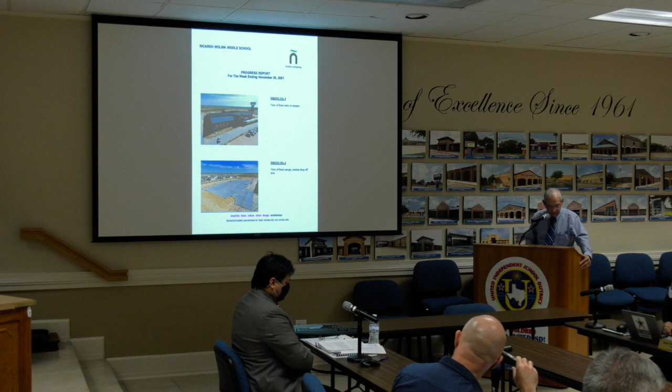Other photos show the academic wings moving along really well, with very nice colors. The brickwork is pretty much completed on that section, and then looking north towards the campus on the rear part of the facility. We have some more photographs to give you an idea and concept of how the campus will actually look in the entire area. That's the front entry, and then we're looking at some of the student drop-off areas.

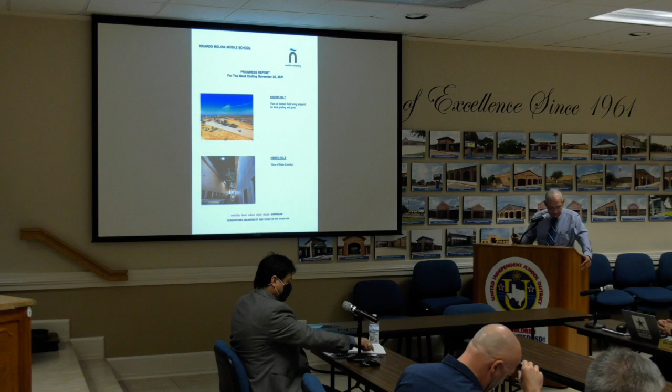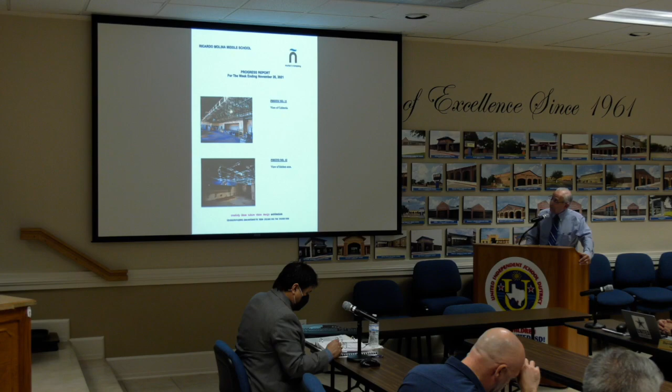Photos 7 and 8 show more of the internal view of the mall area, already under construction with the finishes, plus the library and cafeteria. As you see, most of the components are in place: mechanical, electrical. We're already running the network infrastructure, working together with instructional technology and other contractors. In the kitchen area, all the equipment is already in place.

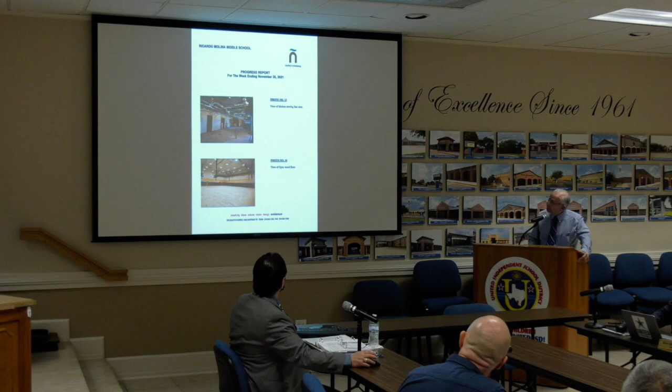As far as the walk-in coolers and freezers, we've got all the equipment in storage, and as soon as the electrical is completed, they'll be installing it next, probably early January. Some of the serving line areas also already have the rough-in completed. The gym wood floor, as you see there, is already completed - they're just sanding and going through the process of applying the coat and the varnish. Then there are some student toilet rooms, the science classroom - all the long lead items are already installed.

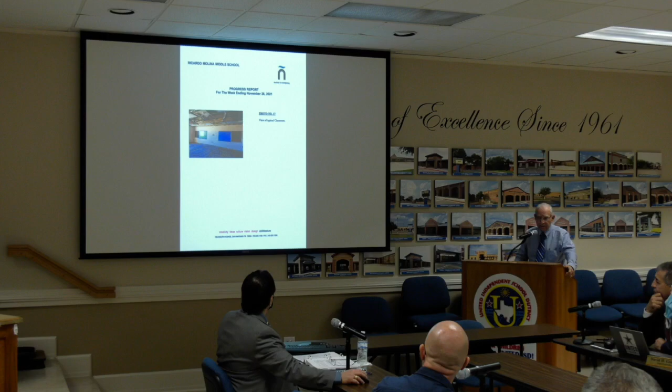These are just typical classrooms, as you notice also in the previous photo - some of the lab floors, as well as the classrooms, are covered with heavy-duty plastic visqueen to protect the floors from contractors still working in there, with some subcontractors finalizing the network or electrical installations. So every room is covered for protection. Any questions on that first campus? Moving along to the second middle school that we started back in June.

Okay, so there we are on 10%, 0 days of extension. Of course, we just started 5-6 months ago, but moving along really well. We still have the same date as was in the contract for May 15, 2023.

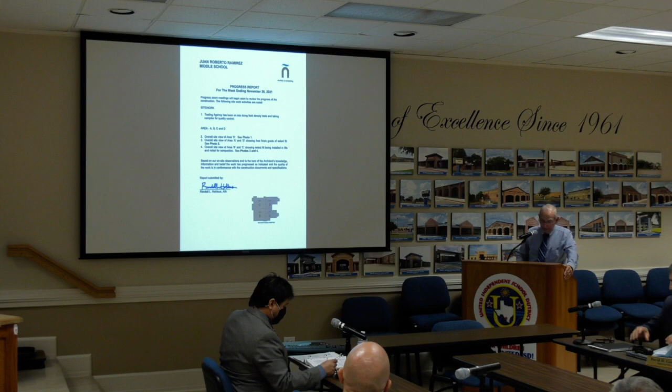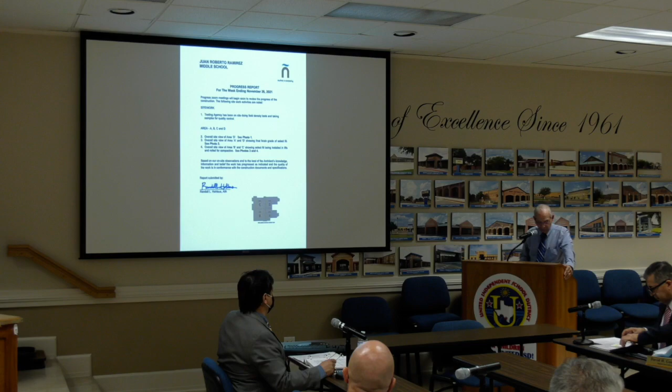Again, the architect's report from Randy Hollis, just mentioning that the select fill has been completed for area A and D, and as well as B and C is being installed. You see some of the photos. I know they're not very glamorous, it's just site work, but those are very critical phases of construction to ensure it's a proper building, set up the right elevations, and everything is in good place for a proper foundation to be built over that.

You can see, for example, in photo number 2, how level and well compacted the terrain has been developed. We brought in 4 to 5 feet of very good quality select fill. Some of it was from within the site, to ensure, by the geotechnical engineers, that it meets all the specifications. Actually, the engineers come from San Antonio to inspect that soil characteristics. They sample it constantly every week to ensure that contractors continue meeting the specifications.

Overview of some of the other areas. You see the equipment still working. There's a substantial amount of earthwork. We've been really working since July. They're about finished with the site work.

We anticipate getting a building permit for actual construction, because we did get a permit to expedite the process and save time and money while the property is being platted to start construction. It's one of the benefits of this project doing design build. You can build the site work, we know the prototype, while the rest of the plans are completed, we get a building permit, and we're platting the property. So everything is being done concurrently.

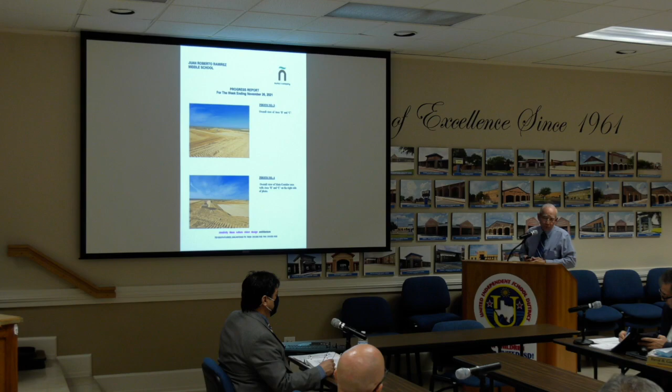And that's all I have. Any questions on this project? Thank you. Good.

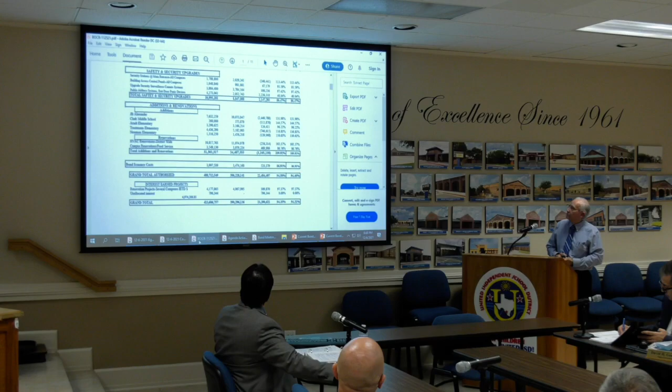The bond construction program update, please. Yes, Madam Chair and members of the committee, the Business and Finance department put these numbers together. Obviously, since we just met last month, there's been minor changes. I believe we paid $147,000 in POs, or maybe a few small reclassifications and expenditures.

Wow. If anybody has any questions. Thank you. Thank you for everybody's guidance, helping us get here.

Okay, action items? Sam, I'm sorry. Yes, go ahead. Real quick, going back to the grand total sheet. Where you see the $23.3 million left over, is that including or not including the action item here that we're looking at, the $19 million? Not including. Okay, I got you.

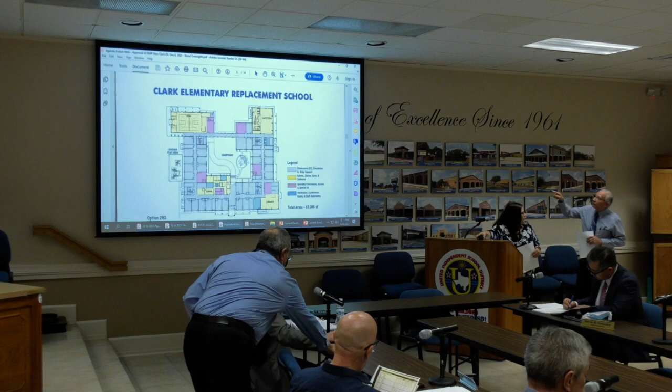So, tonight we bring to the Bond Oversight Committee this final project. It's one of the two replacement campuses. Salinas Elementary School has been completed, and now this is the last one.

We do have a very detailed GMP to back up this number on actual costs submitted by the contractor, and I believe it's in your packet. If you go to the next slide, just to give you an idea of the final floor plan and site plan.

This is what was finalized in meetings with the campus administrators, curriculum and instruction, the architect team, and the contractor. As we mentioned at the last bond oversight meeting, we're keeping the same concept as the prototype we built for the 5 new elementary schools, including the one at Salinas, with the exception of this Clark Elementary, because of the attendance boundary.

It's a smaller campus, less classrooms, but all the other amenities, highlighted there in yellow—the cafeteria, the library, the gymnasium, the nurse clinic, administrative areas—all that support we call administrative, library, gym, and cafeteria, remain the same size, whether they're going to serve 900 students like at San Isidro or Salinas Elementary, or in this case 450 to 500 students. The difference is the amount of classrooms.

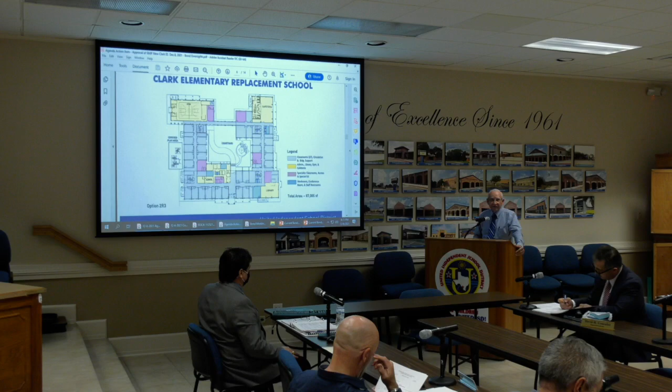Even though less population is projected, about half the typical, we do have 2 special ed units at this time at the existing Clark Elementary School, and it's very good support for the community. So we are maintaining those 2 self-contained special ed, SLC units, for our special populations. Very important that we address their needs.

On the computer classrooms—what used to be computer classrooms in this area in blue, as well as this other area—based on what curriculum and instruction tells us, now that every student has a Chromebook or computer, the old-fashioned computer lab model where students go to a room and sit in front of a computer is no longer being used. But we wanted to keep those areas because it works really well for the design. If we start taking too many areas out, the metal building and everything would change dramatically, so to save on engineering and construction fees, we maintained the spaces and left them there.

It's available for the principal—they always say they need more workrooms for teachers, staff development, conference rooms, or it can even be used for staff restrooms in the future if we need to grow. The area is here, as well as here, but you'll notice it doesn't have computer stations all the way around—that's based on the instructional, educational specifications. I think it's very creative to use that space like a multi-purpose room.

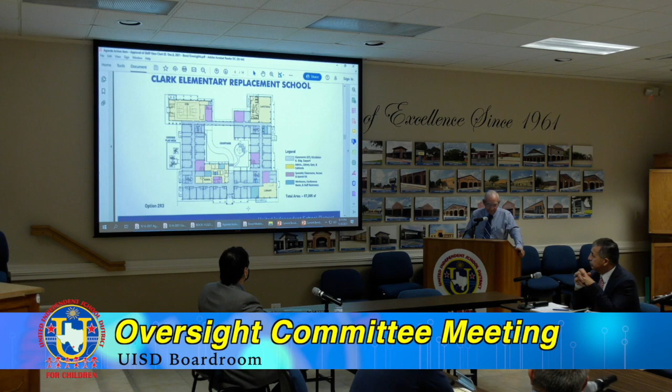We did maintain the courtyard, based on the 5 elementaries and previous 10 elementary schools where we used this prototype. It's a very effective use of the area for an outside classroom, an amphitheater. Teachers really like it, especially now with the pandemic and recommendations to go outside more with fresh air. Students have class, lectures, events, and special ceremonies and functions out there. It's a very nice courtyard.

We still maintain the focus on security, which parents have always expressed as their number one goal when we design the school—that students are enclosed in an area with a teacher, safe from any intruder or access from the back part. That's why we have a corridor there. In the previous design it was kind of an open area, but now it's totally secure—just a brick-enclosed hallway corridor with surveillance systems, so nobody can really get in. That corridor communicates between the gym, hallway, classrooms, the cafeteria, and the science classroom, which is this room right here.

These are the early childhood grades: kinder, pre-kinder, first, second. These are the upper grade levels, fourth, fifth. They need more access to the science classroom and also access to the cafeteria from the gym or vice versa. The total area is about 87,000 square feet versus 110,000 for the previous prototype.

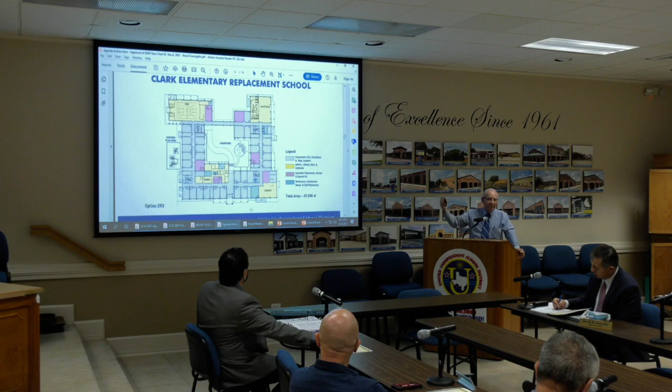Traffic engineers, we met with them last week with the architects, Eric Quiroga, Juan Homero Sanchez, and Leindecker, to look at the overall traffic plan so we can go talk to the city about what would be serving the needs of the school and the community.

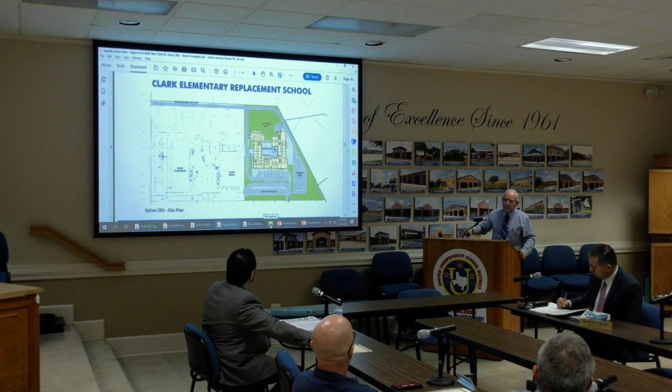Right there, we're looking at this proposal. It's $19,027,000, like Ms. Jackson mentioned. It does include the contingency allowance.

For the cost per square foot, we had to exclude the site work, off-site areas, architect fees, and equipment like kitchen equipment, because RS Means, which we passed out to you all, treats every project differently depending on the site. One site may cost exorbitant amounts to bring in fill if it has steep slopes, or if utilities have to be brought from half a mile away. Keep in mind RS Means is a national average across the entire country, including rural areas, small school districts, and very large districts.

But that's why they have an adjustment factor for Laredo, Texas, which is 81.8%, highlighted for you on the third page. Whatever RS Means says is the average cost for a median school, we multiply by 81.8%. We passed this out as a handout to give you an idea, because prices in Laredo, or South Texas generally, run about 20% lower according to RS Means studies. It's not going to cost the same as in Dallas, obviously, so you have to adjust, and they have a factor for every city in Texas.